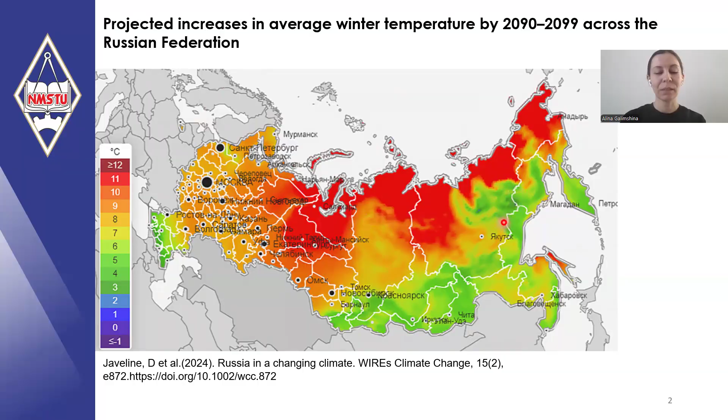And actually, about 85% of the Russian Arctic lies in permafrost. And unfortunately, temperature there is rising about 3.7 times faster than on average. So climate change is definitely a big issue, and it's mostly associated with anthropogenic emissions, of course.

By looking into the CO2 emissions in Russia by year and sector, we can see that actually the biggest share of the CO2 emissions is associated with power generation, so electricity supply, which is followed by industrial fuel combustion, transport, and buildings. These four sectors define the overall CO2 emissions in Russia.

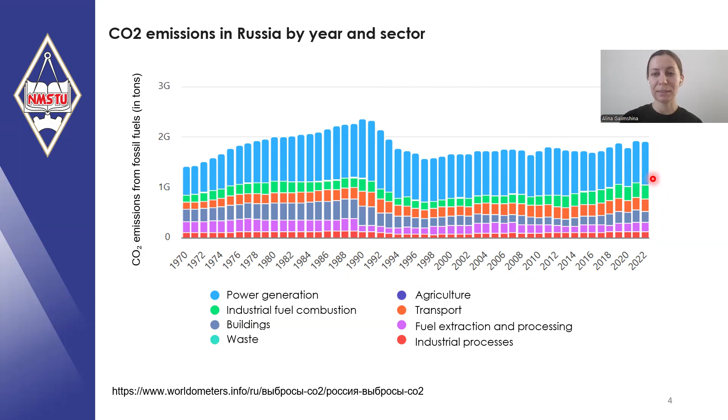But actually, if we look into those emissions a little bit differently and see where power generation is supplied to, we can see that buildings have predominant energy and emissions in Russia, which are defined by the non-residential buildings, residential buildings, and the actual construction industry. So the production of the building materials and the construction of the building.

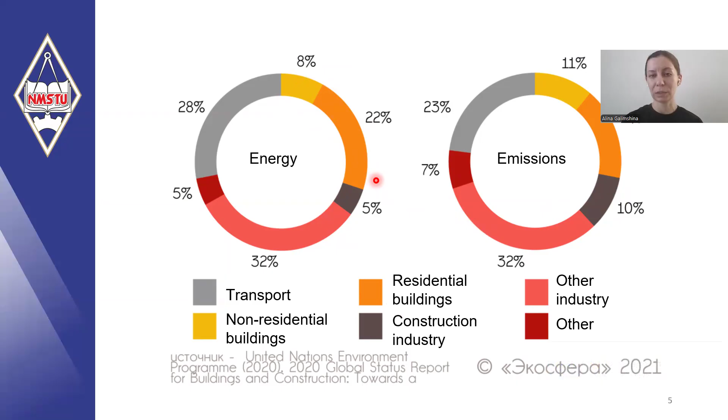So first of all, we analyzed the future climate in the city of Magnitogorsk. And here we can see that our climate now is quite continental, so clearly defined winters and summers. The temperatures are ranging from about minus 30 degrees in winter to plus 30 degrees in summer. For instance, today it is about minus 30 degrees actually, so the minimum possible temperature nowadays.

By analyzing the future temperature using the MORPH EPW platform, we can see that the climate will still stay continental. However, in summer, the temperature will rise to a more extreme plus 45 degrees, and there is quite a big increase in winter. So the minimum temperature in winter would be about minus 14 degrees Celsius.

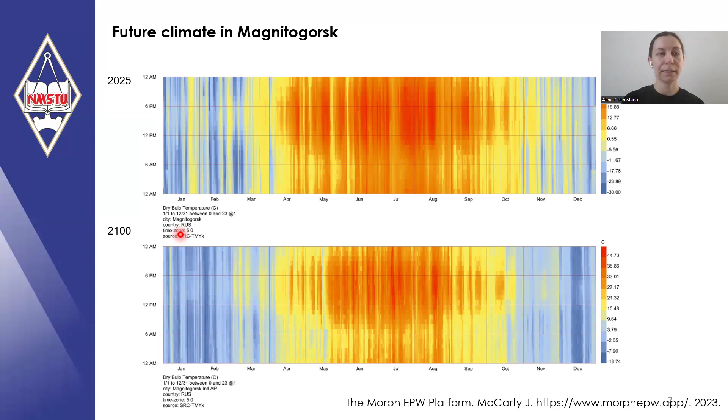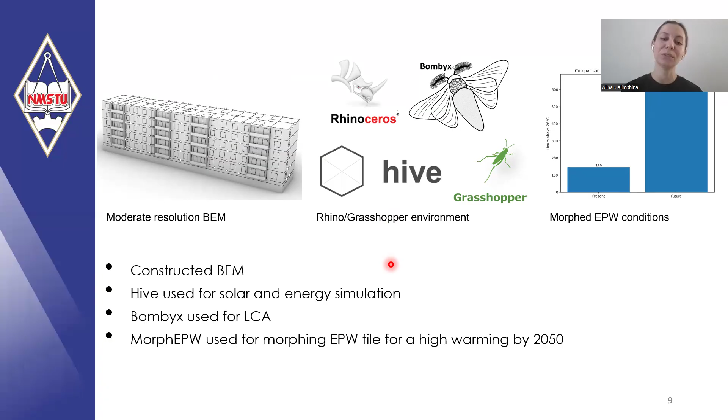So basically we constructed the building energy model under moderate resolution and used the Grasshopper plugins called Hive and Bombyx to analyze the solar and energy consumption and also life cycle assessment. For those who don't know, life cycle assessment is a methodology that is used to analyze the emissions from the building or any other product over its whole life cycle.

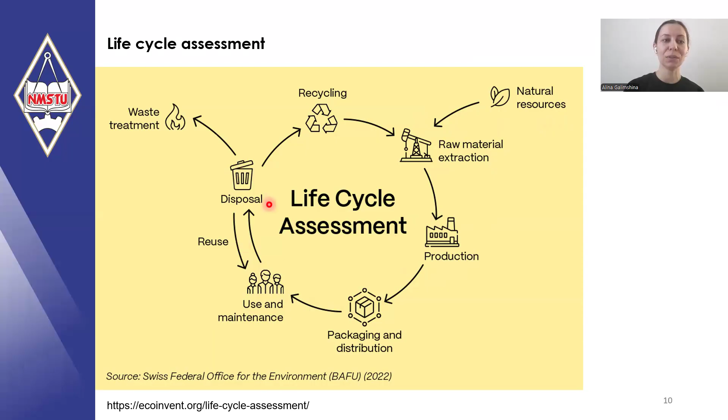So from the raw material extraction, when we need to supply natural resources to produce building materials, to the actual production and construction of the building. Afterwards, it's building use, so heating, cooling, electricity consumption, and the end of the building life cycle, which is either disposal or waste treatment or further recycling and reuse.

In this work, we used the following stages of life cycle assessment. So it's the product stage from A1 to A5, so raw material supply to the construction of the building, and also the replacement stage. So at some point we have to replace our windows or thermal insulation, and we also analyzed the operational energy use of the building, which was heating and cooling.

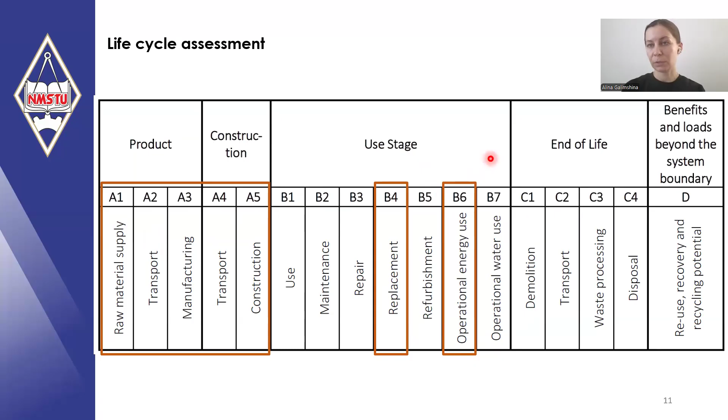So the idea was to improve the envelope characteristics of the building. As I said, the building was constructed in the second part of the 20th century, so it is quite outdated in terms of the building codes. So what we did, we basically used the thermal insulation to get to the properties that are required nowadays by the building standards. The changes to the fuel of the heating system was not possible, so we kept it as gas.

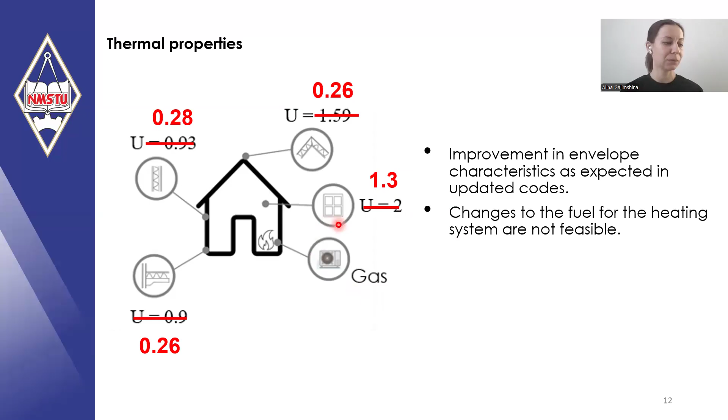Regarding the materials, we have selected two options. The first option is the most typical materials that are used nowadays to insulate the building. It's mostly expanded polystyrene or rock wool with double glazed windows with PVC frames. The second option was more a sustainable option, so it's more mineral wool and expanded clay aggregate to insulate the attic, and the same windows but with wooden frames.

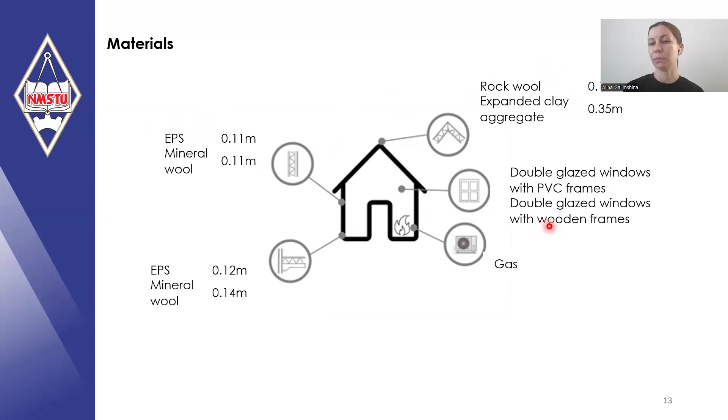Jumping straight to the results. So first, we have analyzed the heating consumption. On the y-axis, we can see the heating demand, and there are the months. First of all, is the original building with the temperature from 2025, which has the highest heating consumption, which is a little bit lowered if we just apply the future climate. So the heating does reduce because it's getting warmer. Makes sense. Afterwards, we can see that when applying the energy efficient measures, we do reduce a lot the heating demand, and even further if we apply the future climate.

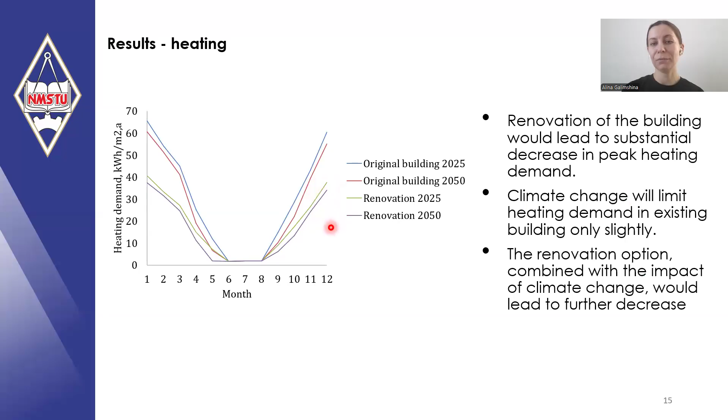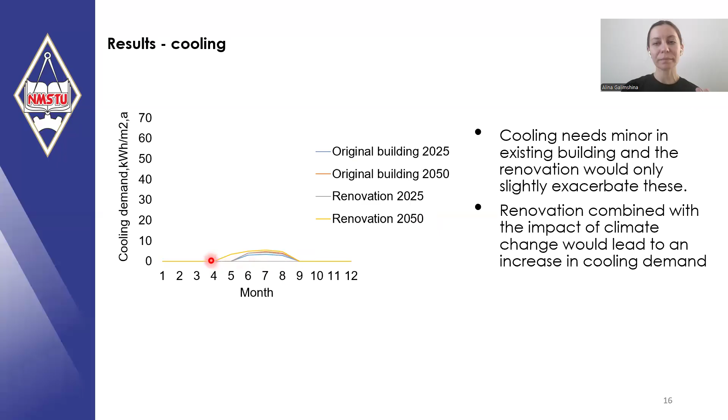The second result was about cooling, and even though it gets warmer in the future, the cooling still stays as a secondary energy consumption type. Basically, the worst scenario happens when we fully insulate our building and we apply the temperature from 2050, but even then, cooling is minor compared to the heating.

Looking into the LCA results, the worst is the current, of course. It's fully supplied by gas, and we could see the temperature, it's quite cold, so we need lots of gas to heat our building. So the overall GWP, global warming potential, is about 84 kg CO2 equivalent per square meter per year.

By applying building renovation measures, our option one was the most typical one, and option two was a more sustainable one. We can see that actually embodied emissions, or the emissions that are associated with the production of materials, are minor compared to the operational emissions. And we only reduce the global warming potential a little bit if we apply the sustainable material options. So due to continued use of a gas-based heating system, the operational emissions still stay high.

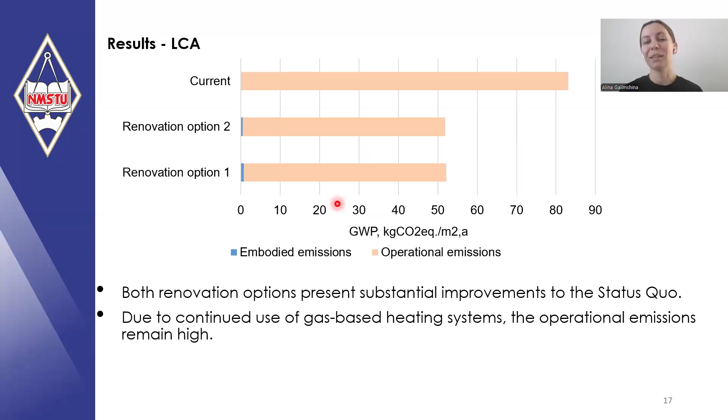Looking at the results of the photovoltaics, we have analyzed all the facades of the building and also the roof, considering the horizontal surface and the optimal angle, which is 50 degrees south in our case. We can see first the solar incident radiation in kilowatt hour per square meter per year, and the actual PV potential if we apply the 20% efficiency and also the actual areas.

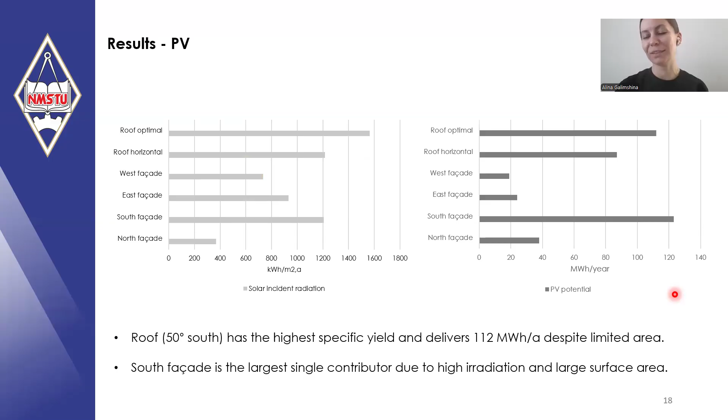So as we can see, the roof has the highest specific yield, and it delivers a lot of electricity despite the limited area. And the south facade, surprisingly, is the largest single contributor due to high irradiation and large surface area. So it means that building integrated photovoltaics would have a high potential here.

So to conclude, renovation of the existing residential building substantially reduces heating demand, and climate change alone only has a limited effect. It does reduce the heating demand, but only to a little share. The improved envelope performance is the dominant driver of operational energy savings. However, if we continue relying on gas, it doesn't help that much to reduce the operational CO2 emissions, even after renovation. Cooling demand remains secondary, but increases slightly when renovation and climate change effects are combined.

And PV integration provides a significant low carbon electricity source, offsetting a large share of building electricity demand, and has even higher potential if the heating system is changed from gas to electricity.